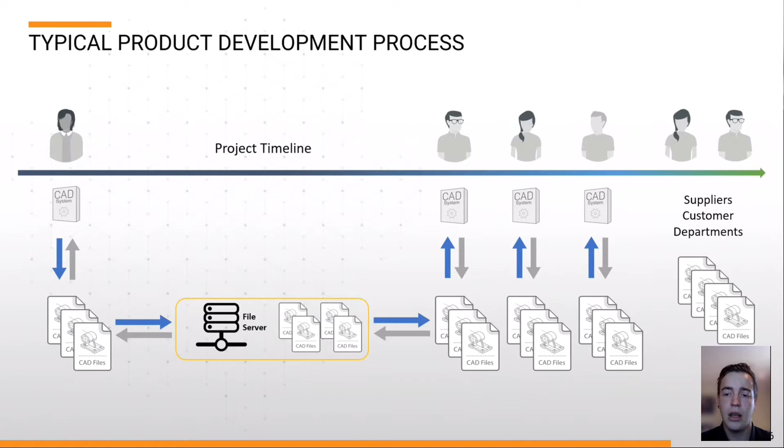There are different ways you can get around this. You can have a file server, or you can invest in a PDM system at further software and hardware costs. So this still has versions of data in the server that you have to maintain. However, apologies.

However, you still have the issue of people having various copies on their personal hard drives. You face file locking issues, and there is still an opportunity for things to go wrong. Soon, you will be asking yourself, who has the latest version? Who is manufacturing the parts? And do they even have the latest versions of those parts which they are manufacturing?

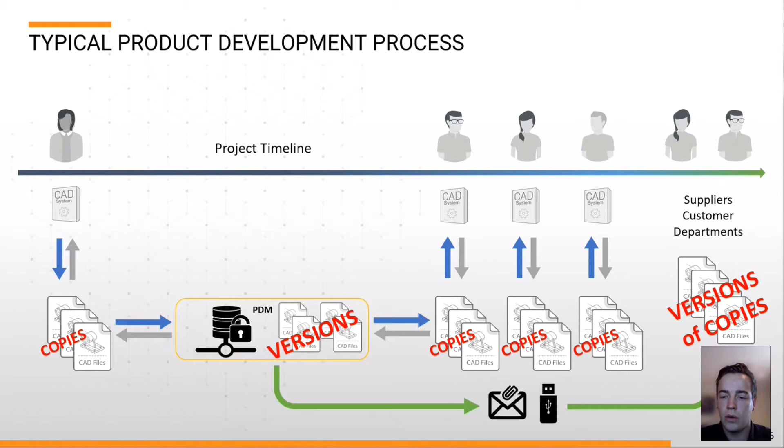And things get worse when you are working with other people who are not within the engineering team. So what do you do? You send an email and you just keep adding to the problem. The way that we are addressing this problem is by removing files from the equation completely, and all the problems go away. That is what the cloud is really giving you. Fearless design and freedom to work on what really matters, product innovation.

This is where the value of Onshape comes in. A full unified cloud solution providing powerful core capabilities and addressing all of the other issues raised throughout this presentation. With data and tools in one place in the cloud, there's no need for downloads, no need for installations, no files, and no copies. It's a global, real-time single source of truth which enables users to work faster.

You've got full version and revision control, workflow and release management, all core to our platform. True simultaneous collaboration both internally and with your supply chain, all accessible on any modern device. Whether you're using Windows, Mac, Linux, Chromebook, you can even use an iPhone, iPad, or an Android device.

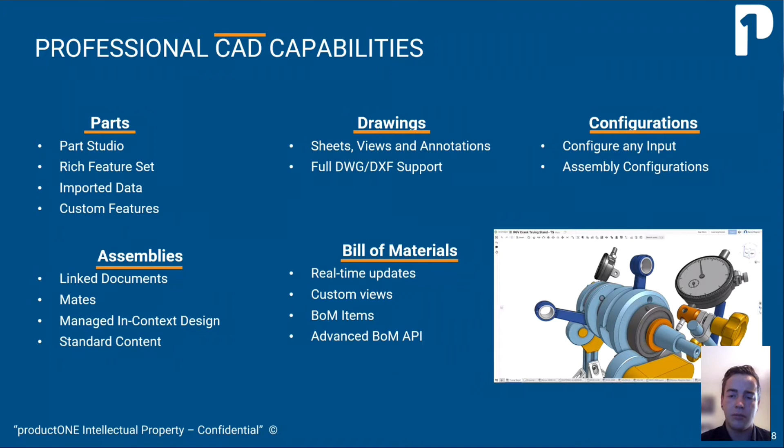Now, Onshape was created by the founder and CEO of SolidWorks, Jon Hirschtick. After leaving SolidWorks in 2011, he founded Onshape with some of the original SolidWorks team members. These guys really understand CAD and have built a fully fledged CAD solution with all the capabilities you would expect from a professional CAD system. From standard content libraries, multi-part modeling, simultaneous sheet metal, and even frames.

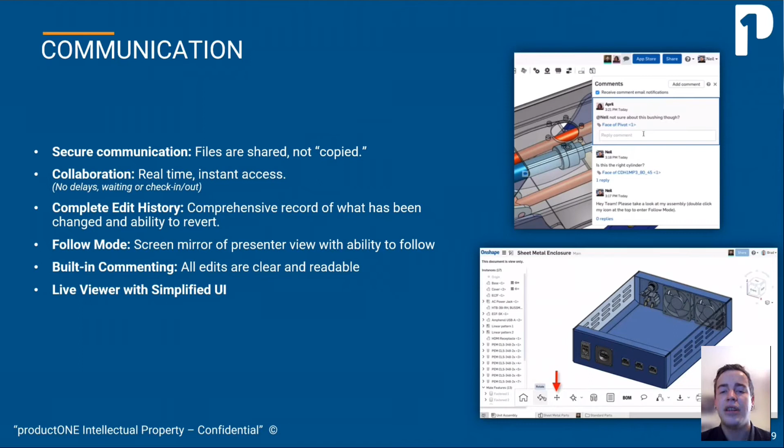And everyone has been there. Your team member recommended changes, but via email. And just as you decipher which part they were referring to, they call you asking how much longer it will take. With Onshape, you get built-in commenting, sharing, and note, not copying, and a full history of every single step since the start of your document.

And here's one of my personal favorites. I was busy with an installation at the new Ford plant, and getting your laptop on premises requires a lot of documentation and security each and every day you check in, only to be left in the container for days not being used. Except for the one day where you decide you won't be bothered and you leave it at home. Lo and behold, procurement phones and needs a DXF or a PDF.

Or when you go out with friends, and no one understands what a mechanical designer or design engineer does for a living. Instead of boring them with the jargon, rather show them on your mobile device.

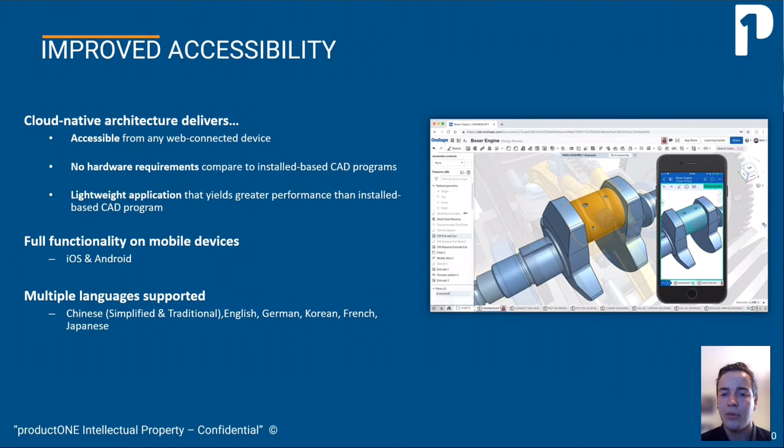And this is every project manager's dream. Analyzing the time spent on a project has never been easier. Getting a more accurate way of measuring the time spent on projects, which helps for future quotations, identifying bottlenecks between designers and or releases. You've got an activity page with continuous updates for all included in the project, eliminating the need for managers or lead team members to send multiple emails just to ask the famous question every designer dreads: how far are you with project X?

Then one key feature or word every designer will love to hear: milestones. The ability to go back to a point after making a catastrophic error, or being able to try something different without compromising the design or progress of the original design.

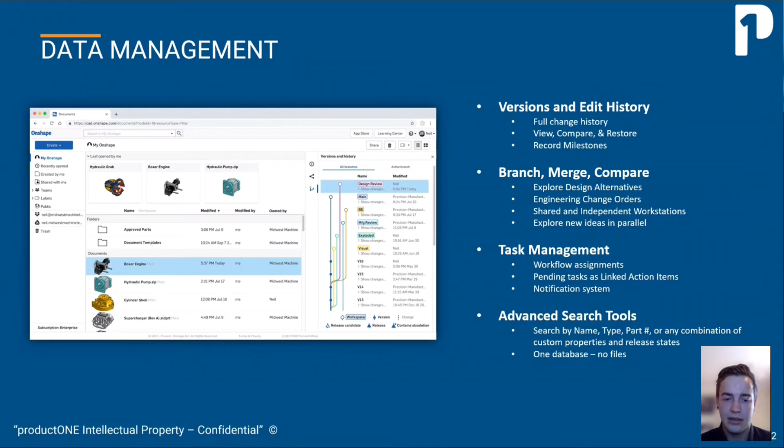Okay, so now on to the demonstration. Our scenario is that I am a mechanical designer for a fabrication company. A client wants a new display unit for some of his products, which he will be using at a festival. The design should only be made up of sheet metal and square tubing. The goals and the objectives of this are to finalize the design, release the design, and share the design with the client for final approval.

So just bear with me while I switch over to my CAD package here. Okay, as you can see here, I'm on my desktop. And as we mentioned previously, there's no installation or download required. All I simply do is open my Chrome, go to the web page, fill in your details, and you can sign in.

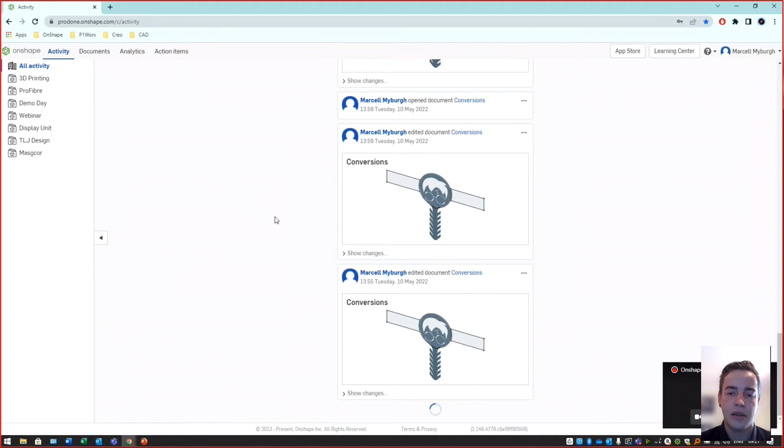My profile has been set up to, by default, go to the activity page, like we mentioned before. Think of it as a news feed. So you can see all the latest documents and updates that have changed or been added. Now onto the analytics. If I go to the left here, go to my analytics, go to audit, and then have an overall activity. Now this is a custom one that I have created. Just move this.

Here you can see the active users, documents, versions, releases, shares. You can even see the modeling time or hours spent on particular projects.

Got your release statuses, all 100%, most active documents, and even the access location.

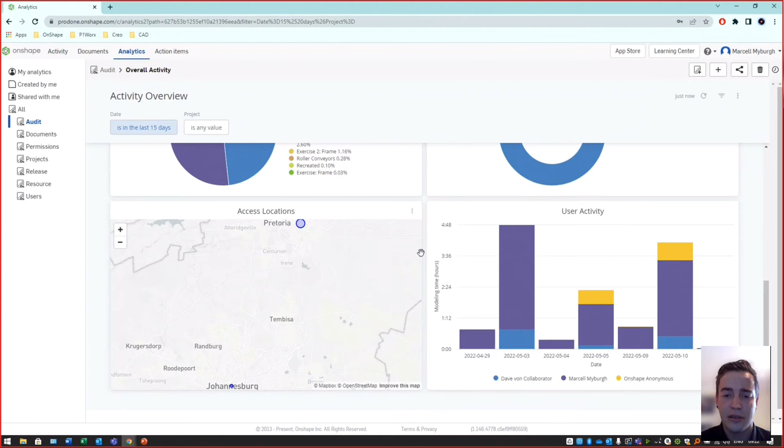Okay, but now on to our scenario. So I just went to my documents folder, going to go to the display unit.

So here's the festival where the display unit will be used for the client. Now, as you can see at the bottom here, I've got my part studio. Got the Cullifest. This is an imported image.

You can even import your PDFs. So if you've got product specifications that you want to add, you can have them all in a single document.

But I'm going to go back to the part studio. So this is essentially the final product which we will be looking at. But now I want to show you how easy it is to get to this step.

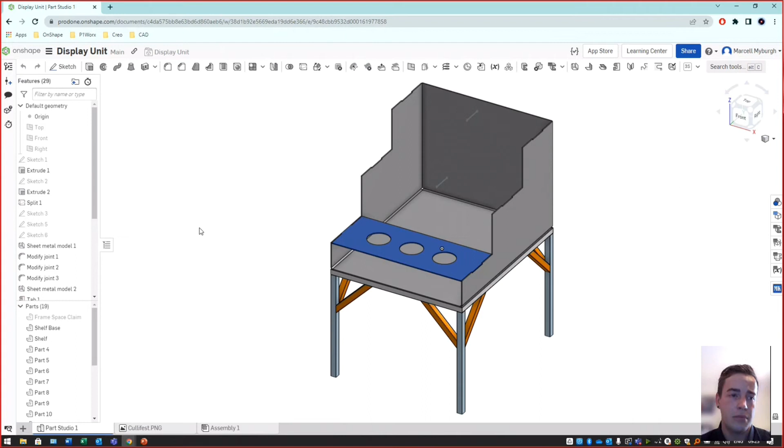So if I go to the left, I'm going to click on versions and history. And you can see down here that I've got branches in different colors. Well, I've tried different things.

And the dots represent certain captured versions that I want to refer back to. So here, as the name states, I've got my space claim. So if you open up the changes, I can see every single thing that I've done.

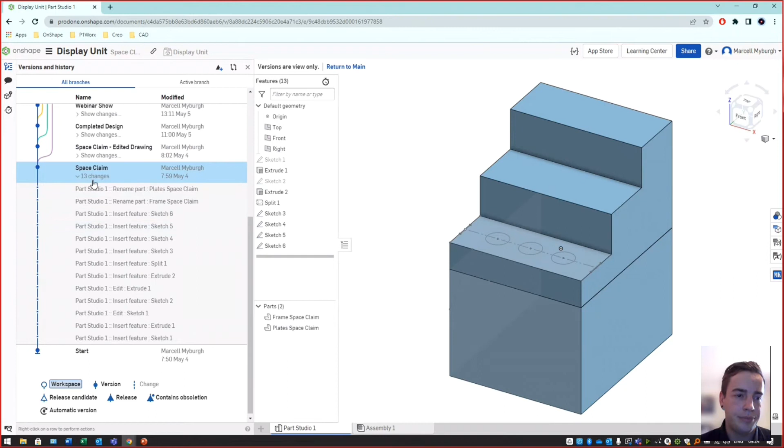But what I'm going to do now is right click on it and create a new branch. Let's call this the final display unit.

Okay, so as the requirement stated, that we will only be using sheet metal and framework.

Now you've got your extrudes, revolves, lofts, sweeps, etc. Everything a standard CAD system has.

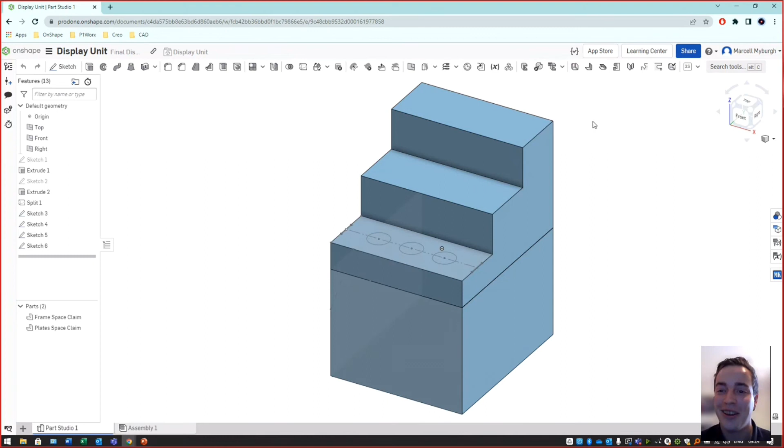But just for now, for this webinar, we will be showing you the sheet. Apologies for the cats in the background. So I'm going to convert this space claim into a sheet metal part.

So as you can see, I just selected sheet metal model. You've got your convert, extrude, or thicken, but we're going to focus on the convert side. Now, if I zoom in, you will see that it has created separate plates, essentially.

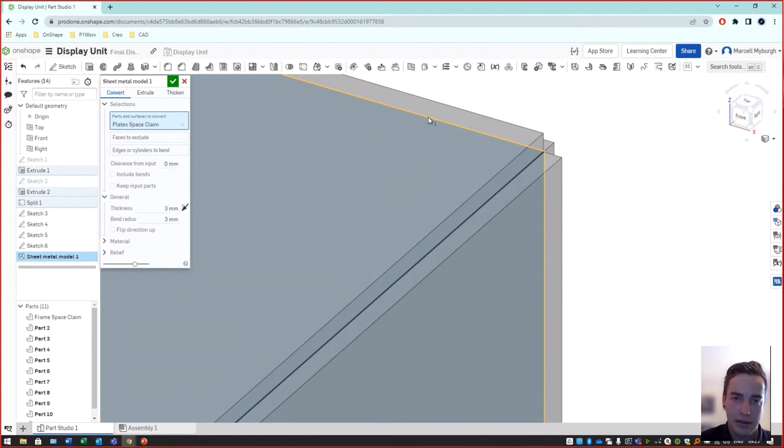But we want it on the inside. And just to show you a feature later, I'm going to change the bend radius to 6.

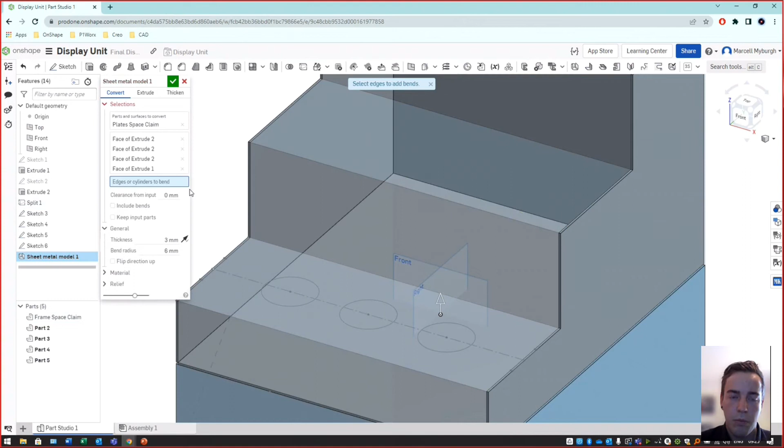Okay, zooming back out. We want these faces to be excluded. So now you can zoom in and select these edges to be bent. But just for the scenario, I'm not going to do it.

We've converted that. And now a great feature, which I wish I had previously in other software: if you go to the right-hand side, you have your sheet metal page here.

Now, if I hover over parts on my flat patterns, you can see that it highlights the 3D image as well, or the 3D part. Now, this is where the great feature comes in.

You can see that it's a name of a certain joint and the type. Now, this has been set to rip. I want it to be a bend now.

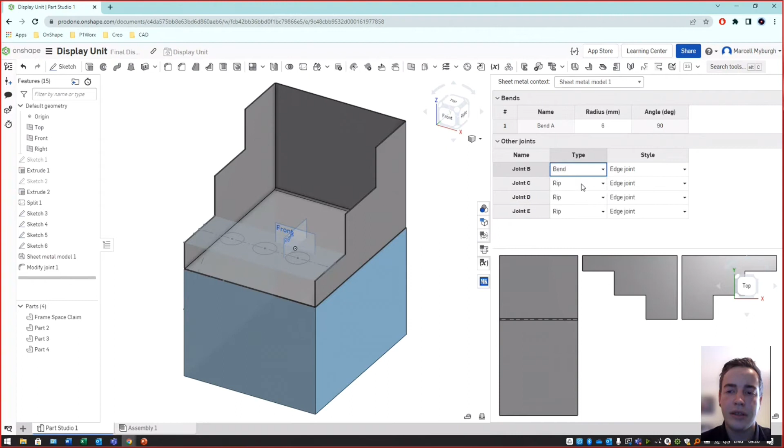So all those times where they've said, yeah, no, to increase the welding or decrease the price of bending, you can do it all on the fly without going back in your feature tree and redefining the entire process.

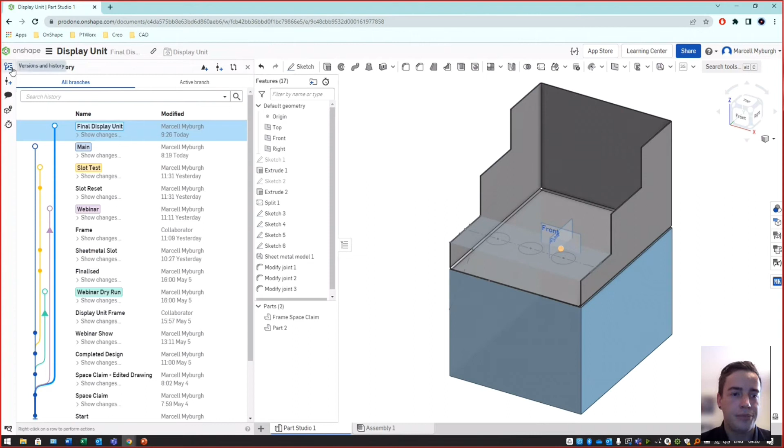But now I want to add some of the collaboration to this as well. So what I'm going to do is just share this with Dave, our collaborator.

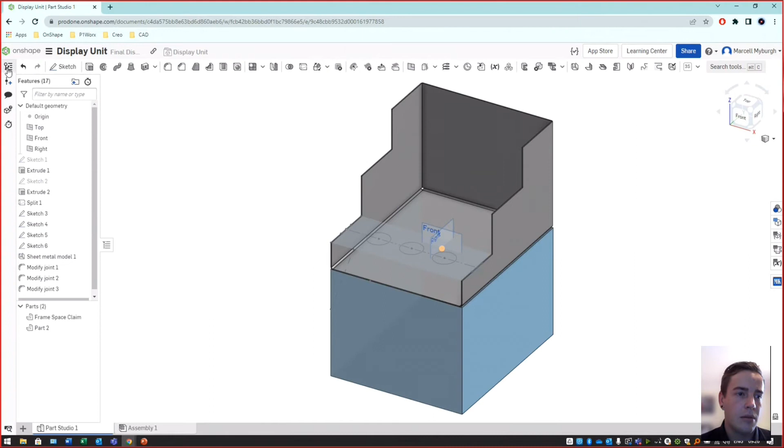And I'm just going to set him to, he can view and he can comment. I'm going to share it with him. Close that window. But now what I'm going to do is just say at Dave,

can you view and later add the frames to the design? You can assign it to Dave. Now, the great thing is I can actually tag the entity which I want him to focus on.

So as you can see, I'm going to click on the face here. It's going to turn blue. You can also have a markup. So I can say he needs to use that edge, that edge, that edge there. And we've got lines just hidden at the back there.

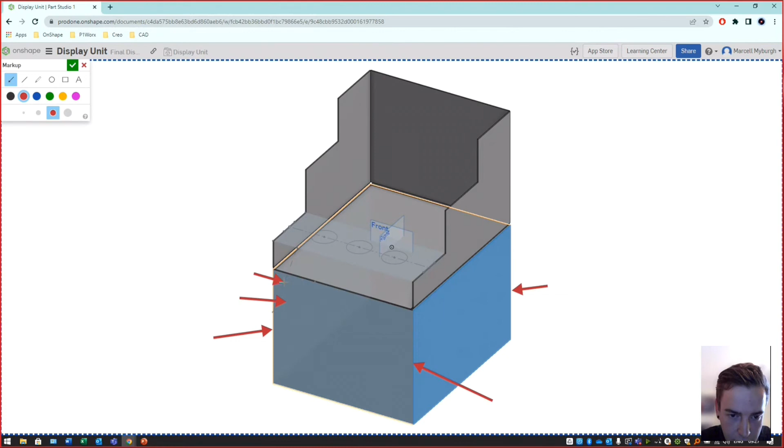There we go. So now I'm going to assign it to Dave. Okay. Gonna close this.

Just going to drag my screen to the left there and show you. Where's Dave's? Here we go. There's Dave. Now here, Dave is currently in his action items.

So if it just refreshes, you should see a pop-up at the bottom. You can see assign collaborator, please view, and there you can see the unit. You can click on it, opens a new tab to view the comment.

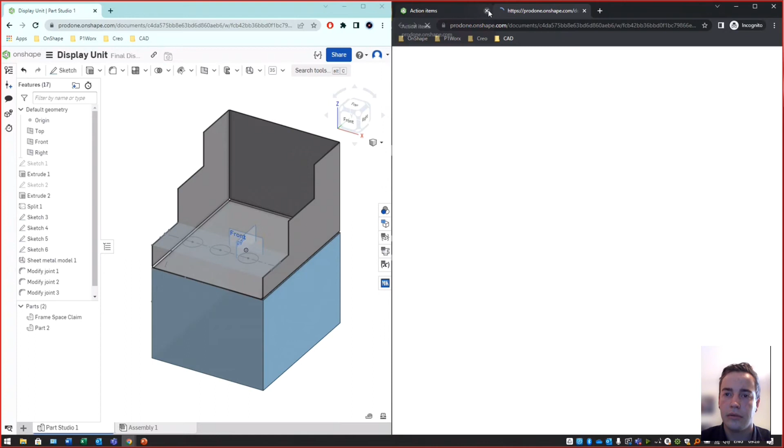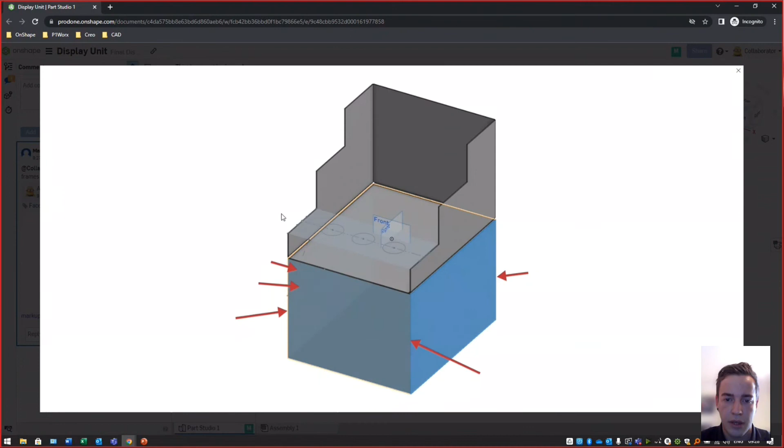Just for better viewing purposes, I'm going to increase the size here. There you can see exactly where his comment is, face of extrude 1. It goes to the viewing angle that I originally made the comment in. You can also open up the image, see all your markups, and even in this light viewer, you can have your section views.

And you can even measure. You can see it's 482 millimeters.

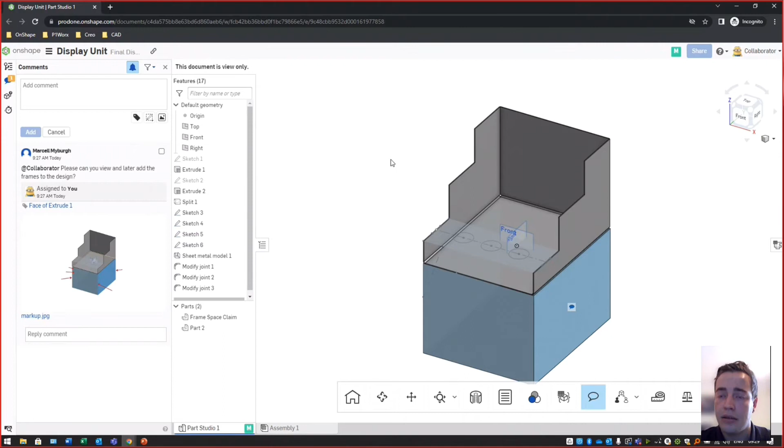So for now, but we want Dave to be able to actually edit this. What we're going to do is simply go share again. There you can see Dave. We're going to edit the view, change it to can edit, and give him all of the permissions.

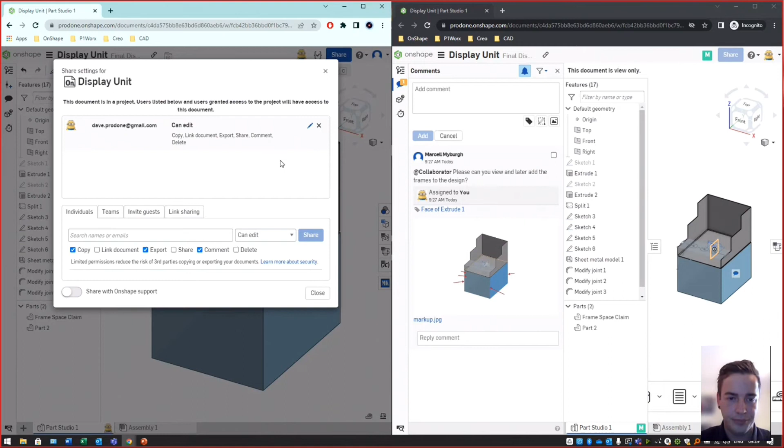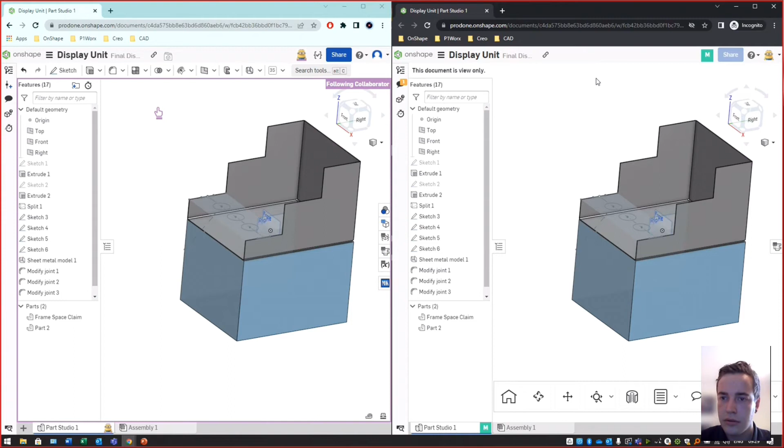So now, as stated previously, while Dave is busy here on the right-hand side, if I, Marcell, on the left double-click on his icon, I can actually follow what he's doing. I can see his mouse movements, I can see how he's viewing the part. Okay, it hasn't refreshed yet. Let's just get him to the point where he can actually edit. Ah, there we go. And he also gets an update that states I am busy following him.

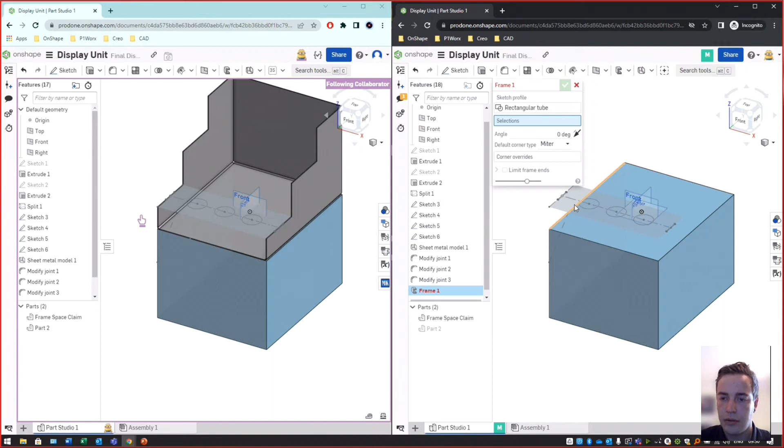So now Dave is going to do the framework. We're just going to hide the sheet metal up top, and, well, don't need to hide that. So when we click on that face, Onshape recognizes all of the edges.

This is universal for your framework, so you can even add a custom sketch profile, or you can use one of the many standardized profiles that have been loaded. We've got 8020, which is your aluminum profiles, AISC, ANSI standard, AS, but we will be focusing on ISO rectangular tubing. We're just going to give it that rounded edge. Hit generate, done, say yes.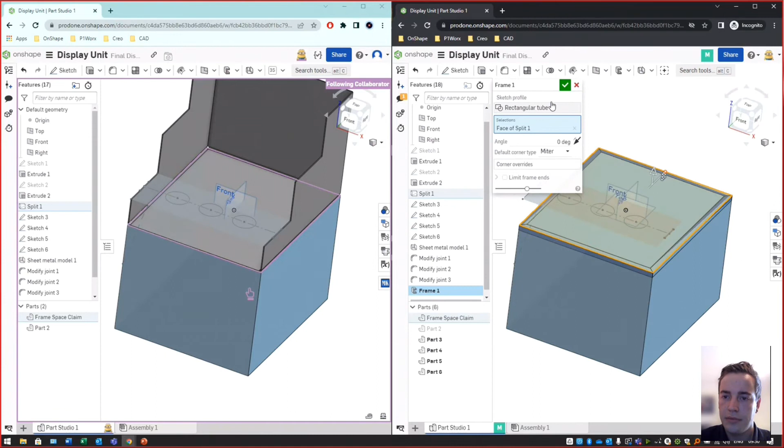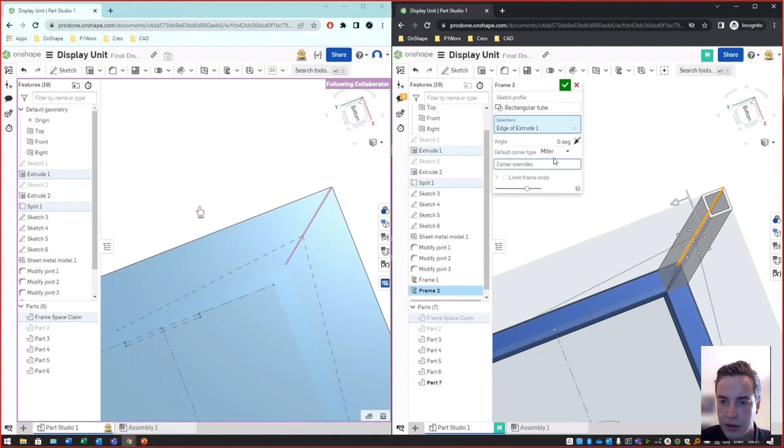Okay, so now I'm going to go to this face. Let's add the frame. Click there. I am just going to hide that quickly. Move it into place. You can even limit the frame ends. That face there.

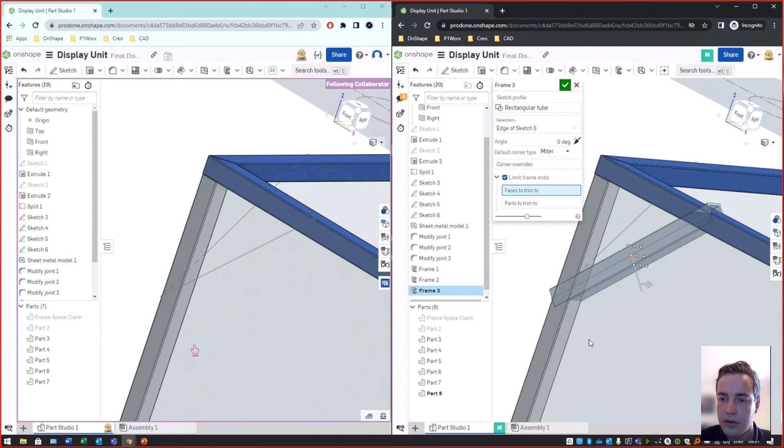So now we need to, of course, add some supports. Just to reiterate, the frame ends, as I mentioned before, I'm going to move that into place. As you can see, it overlaps. I'm going to click on it, faces to trim to. I'm going to select this face and that face. Now you can see it has all been trimmed.

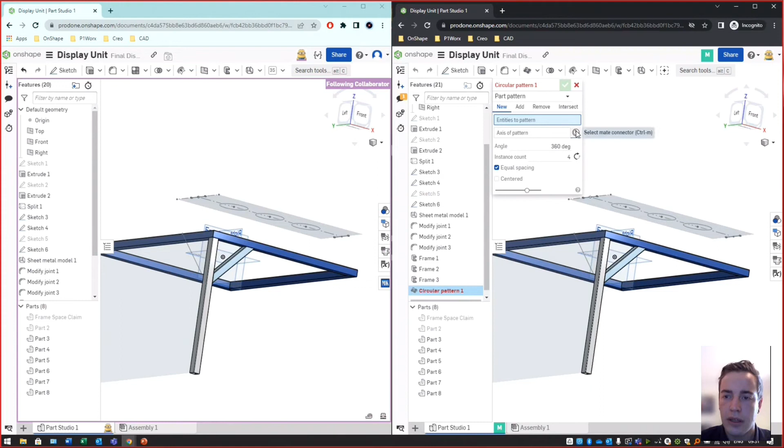Okay, so now Dave is feeling a bit lazy. So he can use this sketch, but let's say he wants to mirror it, or actually circular pattern. Now, usually you'll have to create a new center line or plane around to mirror, but here what you've got is an implicit mate connector. So what that means is it's a feature within Onshape that recognizes the geographical points on a certain part, line, or sketch.

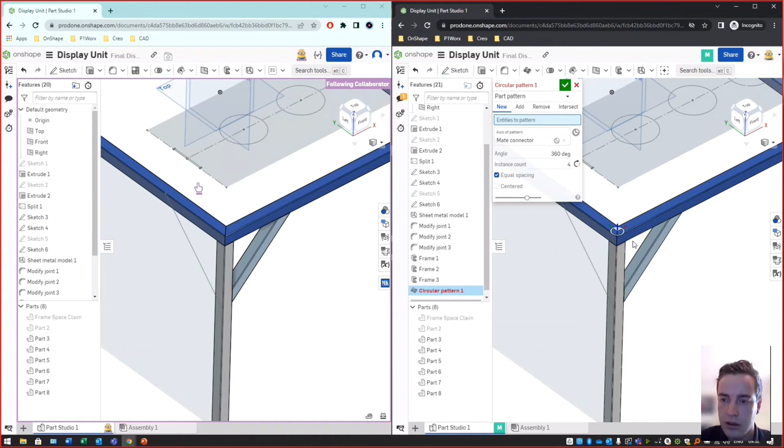So I'm going to select the middle there, select the entity that I want rotated, and there you can see that it rotates it. We're going to limit it to 2, and let's change it to 90. Just flip it around, and there we go. Just going to hide this, hide all sketches, and hide all the planes.

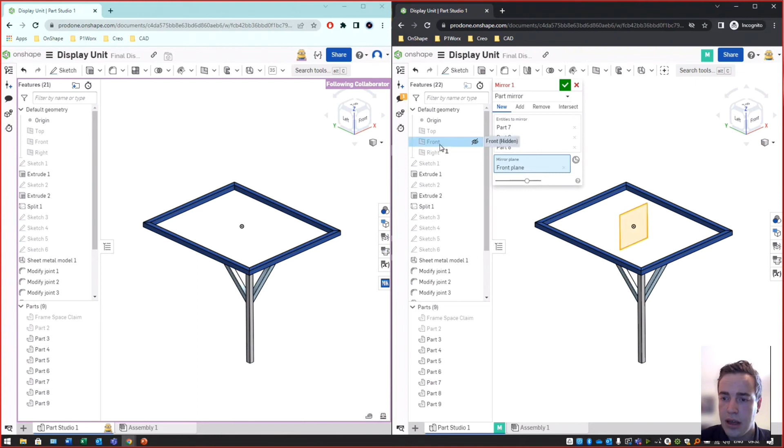And you can even mirror. Now, if you haven't noticed yet, everything that I do, or everything that Dave does, as soon as he clicks the yes or the green check mark, it populates on my screen on the left-hand side. So entities to mirror, we're just going to do this last one. Let's go to the right. And there we go, there's our frame.

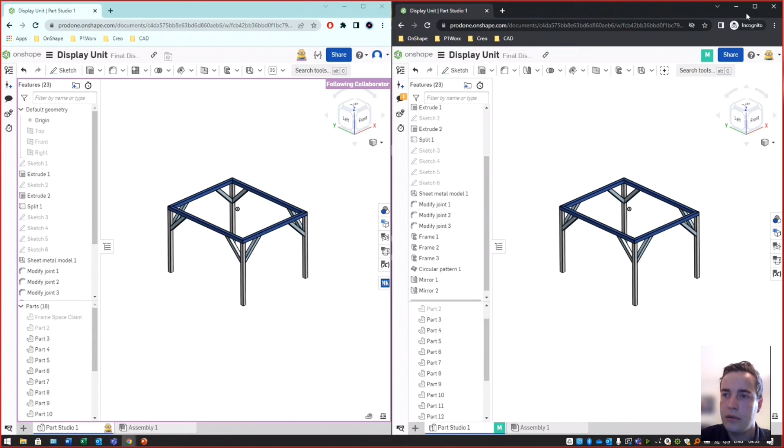So now, for a bit more viewing experience, what you can also do after we've stated this is create your cut list within the 3D modeling space. You can select certain or particular frames if you only want to limit a few, or if you have a sub-assembly. What we're going to do is select all frames. Now you can also add a column. Just want to show you on the right hand here.

Here's the cut list that's already been populated. So you can add a column and say, oh, okay, it just disappeared on me. So all frames, let's call it the project and display unit. There we go, now it pops up.

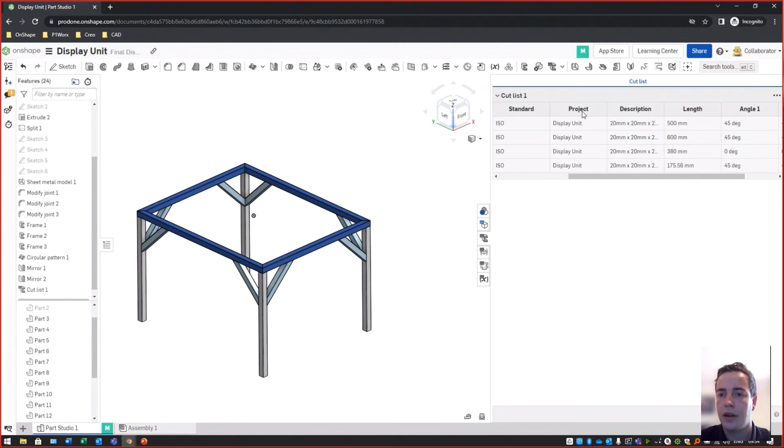So now if I say yes, there's our project. You can right click on it, move left, move right, rearrange it however you'd like, or even hide the column if you wish.

So now, seeing as Dave is done, you can go in here and say reply, all done. You can set it to resolved, just reply. Now he wants to release this design that he just did.

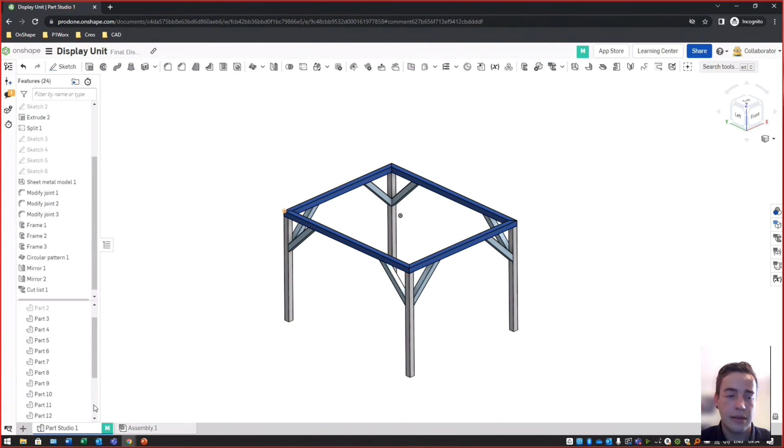Let's hide this one, we don't want that. We want part 2, which is a sheet metal.

Now what he can do is right click on the part that he wants and say release. That's just to release the single part. You can also right click on the part studio and release all of them if you so wish. But seeing as he is only working on the frame, you only need to release this section.

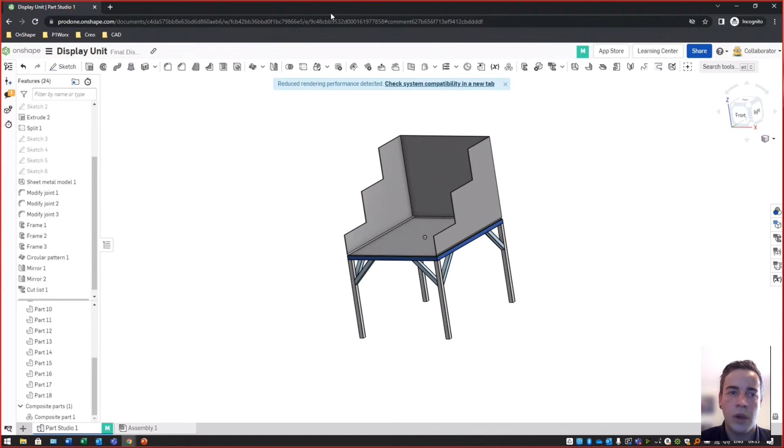Release name, let's just see for our approvers first. But now we see Dave isn't here, and that's because when we shared the document, he wasn't included in the project.

So now we're just going to go back to the documents page for the project, right click on it, edit the project. And there you can see it's only myself that's actually allowed in this project to make project administration changes. Now what we're going to do is we're going to add Dave on a much higher level.

You can change his role to project administrator, engineers, managers, reviewers, or even a supplier that by default only has view only. You can even add your teams, and invite guests like light users, for instance. Now we're just going to add Dave.

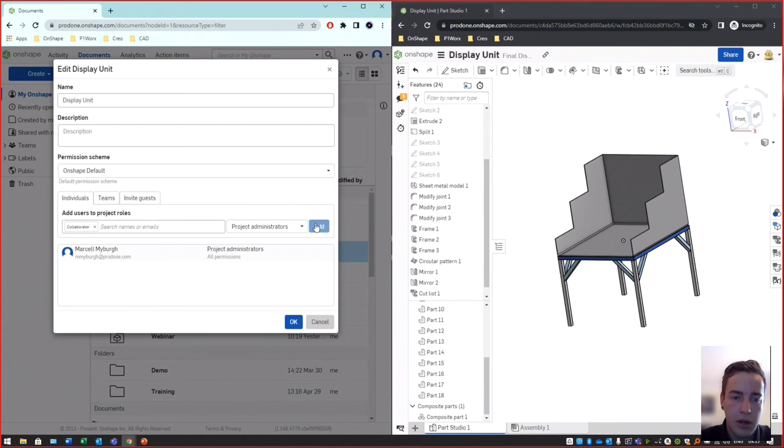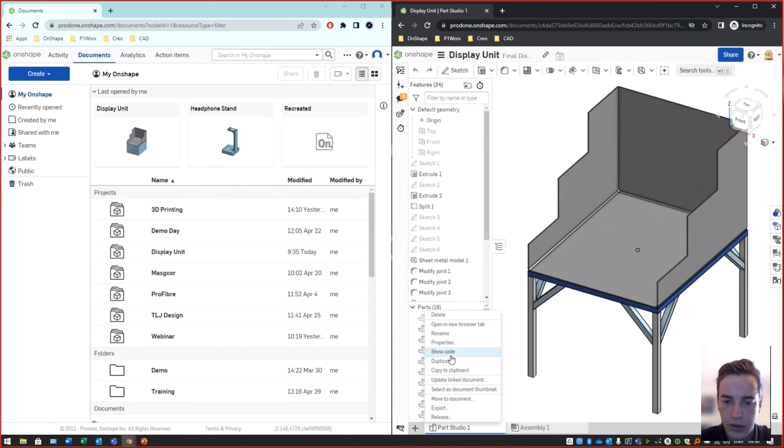So, okay. Now if Dave refreshes, like I said, you can right click on the part studio and then go to release. If I see it, there we go.

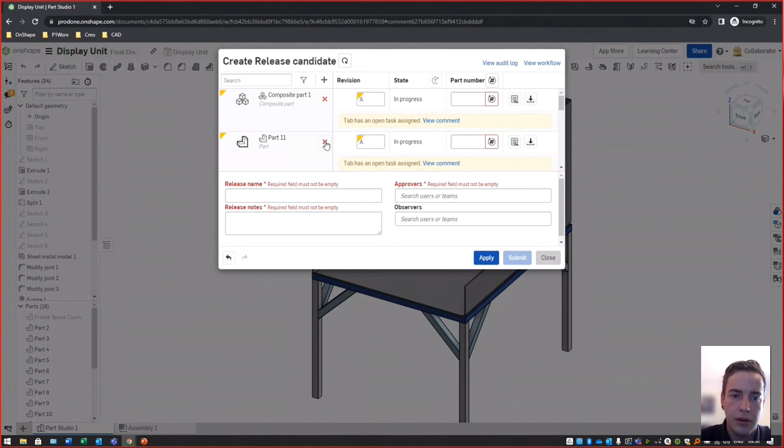Okay, and now, as I said before, once again, just going to increase this so you can see it properly. All the parts are now listed, but we won't be adding any of those. We're only going to be focusing on the actual framework.

So now you can see as I click there, you can share to all the enterprise users, but the approver in this case is me. So you can generate for all the parts if you've got missing part numbers, or you can just generate for a single entity as well.

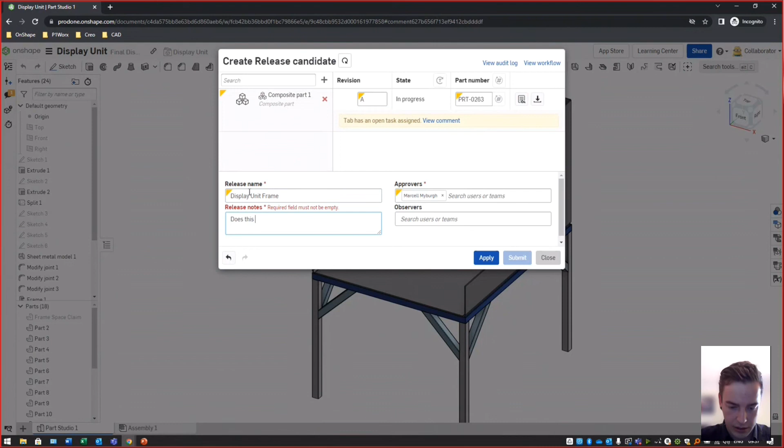That's fine, the release name is display unit frame. Release notes, does this look good? And then you can submit. Okay, so thank you, Dave, that's enough for you now.

I'm going to go into our page, and we should be getting an email and a notification. While we're waiting for that to happen...

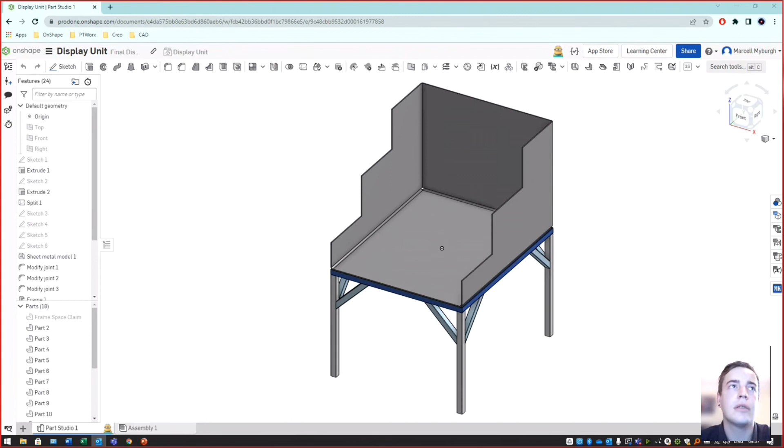Into here, let me just see on the email side. It hasn't gone through. You can see that Dave is still there in the background. What I want to show you, okay, there it is.

Release display unit frame requires your approval. Now this also pops up on your action items, but you can click on it to view release.

Pending comments, and I believe, yeah, there's the email. I'm just going to pop this out for you, and there you can see you also get an email. So you've got 3 points: you get the notification bell in your action items, and via email you get notified.

Here we can click on it to actually go and view it. Takes you directly to the document.

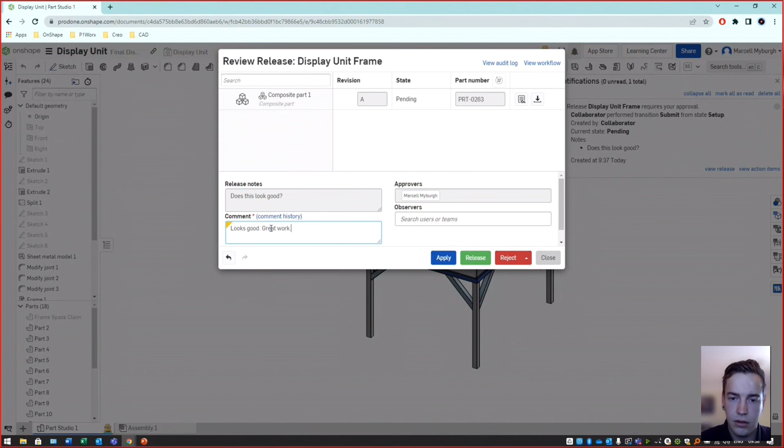There you go. Yes, okay, that looks good. And we just add a comment that says looks good. You can reject it or discard it. You can release it or just apply.

We're going to release that. And there you can see that it's being processed. Okay, transition release initiated by Marcell, mark all as read, and you can delete that latest notification.

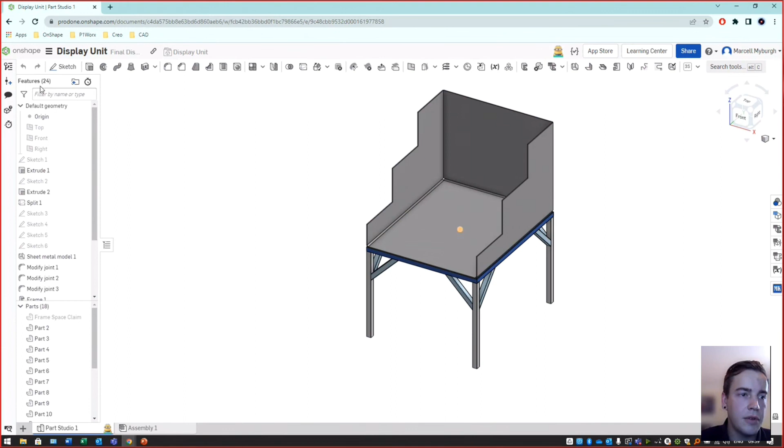So now another feature, if I go to the left-hand side here, because we said that you can actually branch off and try different things if you wish. Why am I not seeing? Okay, let me just refresh this, go back into the display. And there I got another email that just said it has been released.

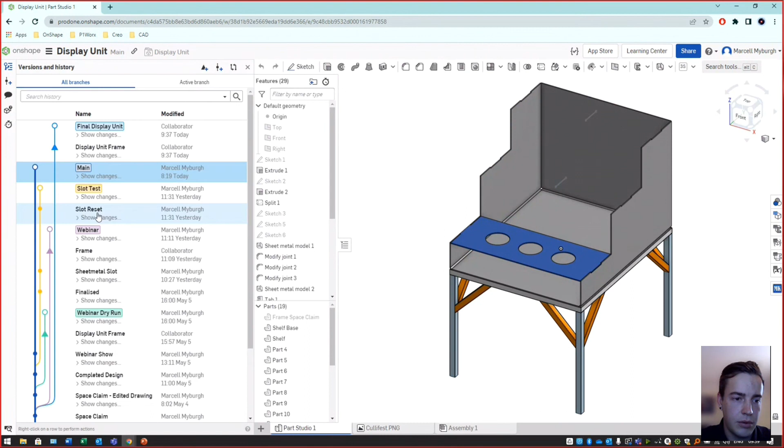Okay, so because we are working on the final display unit, you'll also see on the left where my mouse is that it changed into a triangle from a circle. That means it's a released version.

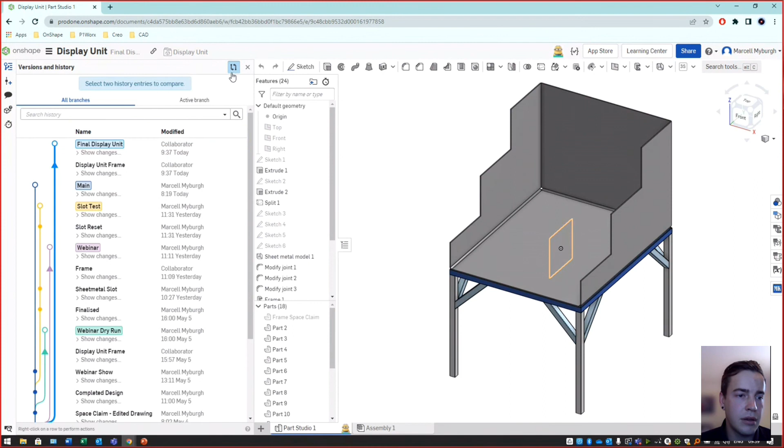So now with the test branches I mentioned earlier, what you can do is actually compare. I'm going to compare this one that we've just been working on with slots that I wanted to add just for some ventilation on the sides.

We'll be met with this dragging bar. On the left-hand side you'll see the display unit in blue, and if we go to the right, I see all the changes that have happened in the slot test. You can even see, if I zoom in, the difference in radius on the bend.

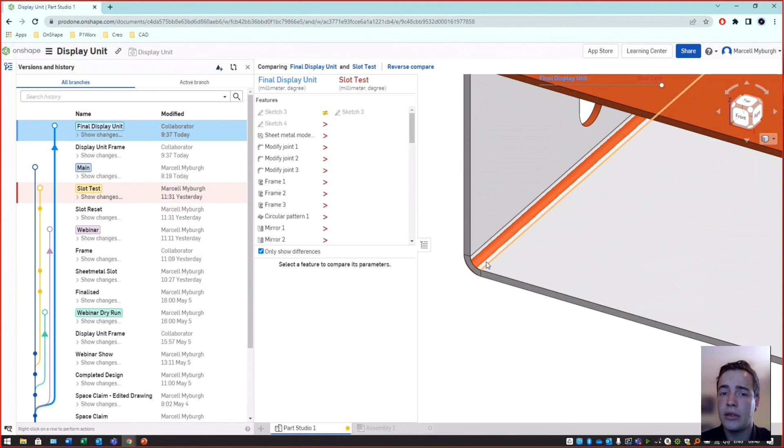Just going to zoom out. You can also see the slots that have been added. You can have this nicely in the middle to see the slight differences, everything that's been added. On the left-hand side you can even see everything that has changed. You can tick to only show differences, or see the entire feature tree that has been added or changed.

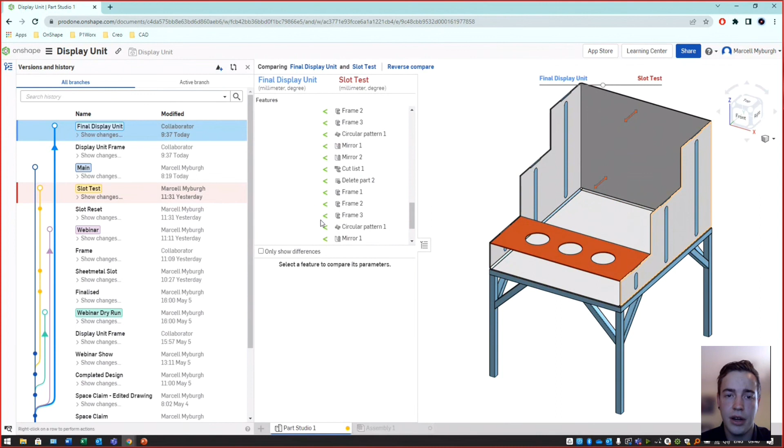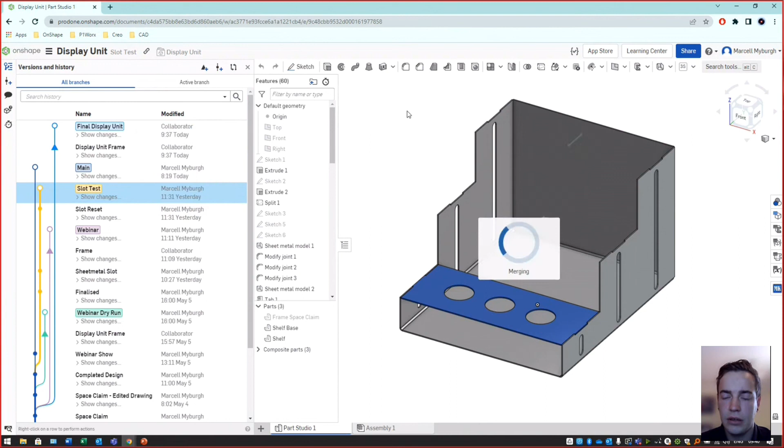So what we're going to do is go to the slot test, that's the part you just saw in the merging or comparing section. So now I'm going to merge the one we just worked on into this, and as you can see, there's the frame that Dave has been working on. So I took it from the final display unit and put it into the slot test.

Okay, so now as an added feature for those viewing today, we are going to do link sharing. As I mentioned before, you can share it with individuals within the corporation, teams, you can actually create separate teams like engineers, reviewers, etc., or team A, B, whatever you want to call it.

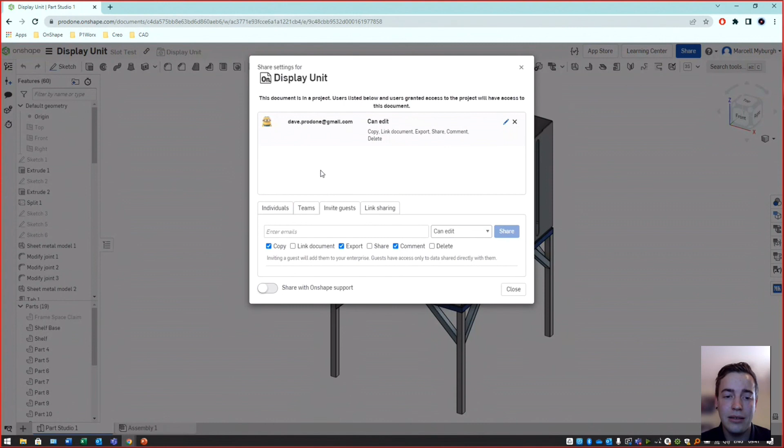You can invite certain guests. As you can see, inviting a guest will add them to your enterprise as a light user, and this is only on an enterprise level. Now for the link sharing, this is perfect if you're working with manufacturers or external suppliers.

You can tick if you want them to be able to export it to different formats. Like, let's say if you've got a drawing, they can by themselves download or convert it to a PDF, and export this as a STEP, Parasolid, etc.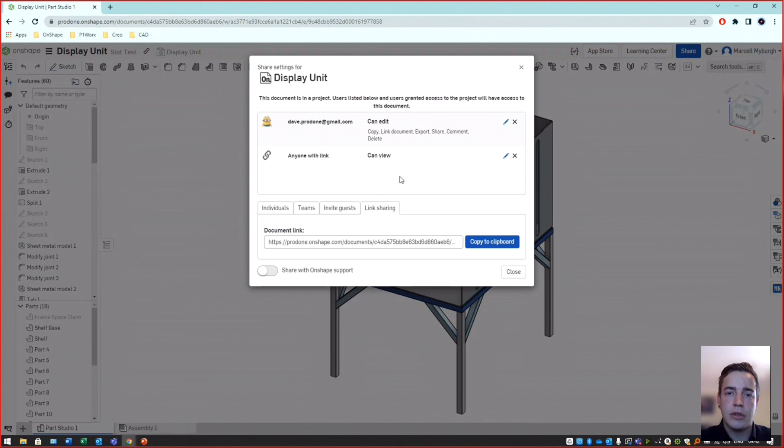So now we're going to turn on link sharing, and now you can see here anyone with a link. Now the links to the documents are... okay, apologies, they are document... I forgot the word now. It's a...

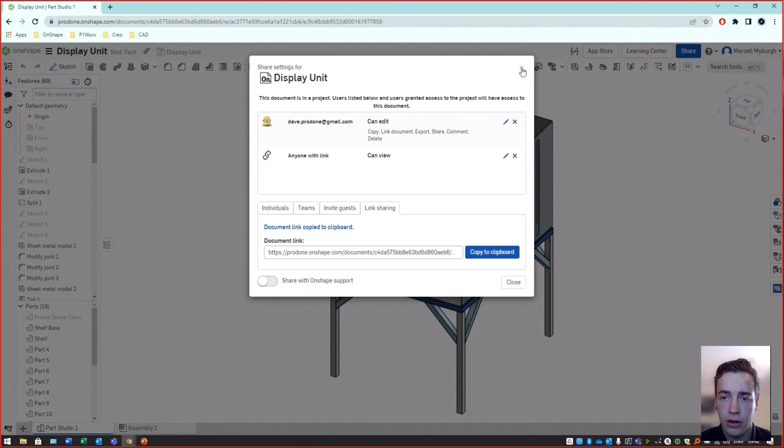This URL will only be for this particular document. So even if I change it in 2 or 3 weeks, if you use that link you will always see the latest changes. So I'm going to post this in our chat.

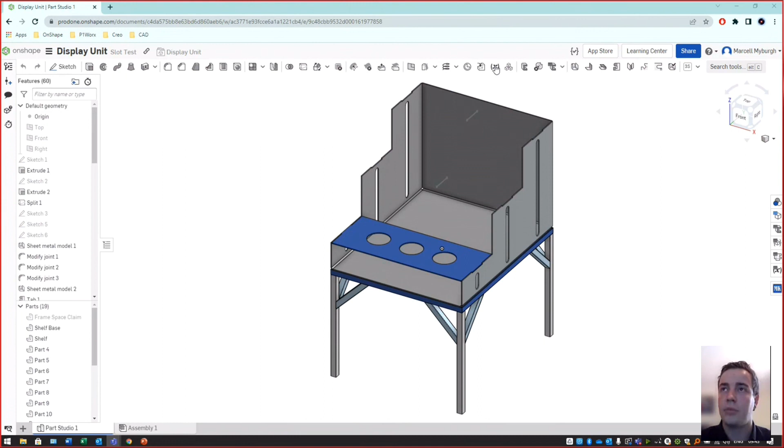So now in conclusion, with the previous demo we just showed you with regards to Onshape, you get a package which enables multiple users to work together on the same document at the same time, accelerating development, managing to identify bottlenecks, and optimizing the development process with analytics. New users can quickly learn how to use Onshape, and light users can quickly and easily access design documents with its intuitive user interface. Anywhere, anytime access from any web-connected device means users can always access their design documents and stay productive.